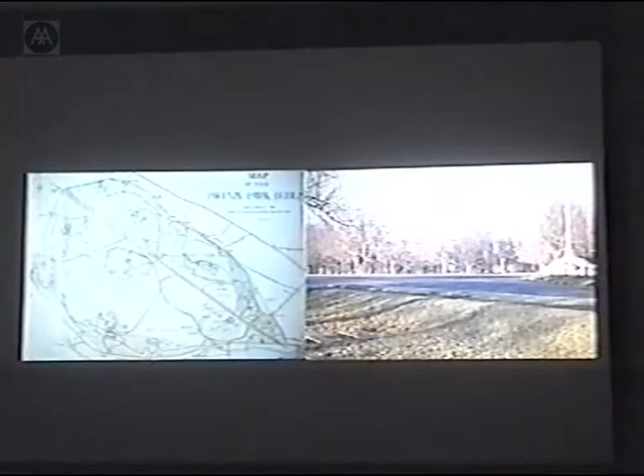They won a competition, and they were fortunate in the people who followed through to build the buildings. This is a famous competition that many people teaching at UCD at that time, or connected with Dublin through the rejuvenation of the School of Architecture in UCD, were involved in. I see here this evening several friends who were in that, with whom I taught, and who were the teachers of architects now in Dublin who have projects.

This, just because people who don't know Dublin are not familiar with it, it's nice to show you the landscape and to show you the city.

North of the city on the west, in Phoenix Park, there was a competition. The government held a competition to build a house for the Prime Minister.

In the Phoenix Park, at the intersection of the park, is the monument of the Phoenix. Behind the Phoenix is an entrance to that site. There is also another site, and a third site, for three important houses: the President's house, the American Ambassador's house, and the former Papal Nuncio's house.

Can I show the next two slides, please? The landscape was that, and coming from the Phoenix Monument in the center of the park, the site for the Prime Minister's house was where there was a neoclassical building that was demolished, and there was a walled garden. The project consisted of two buildings.

There was a guest house and the Prime Minister's house. At the end of the road, we proposed to build a square building on one floor with double height, on 5 squares by 5 squares, with a perimeter on the exterior, with a forecourt on one side of the walled garden, connected through, although separate and independent, access from the north to the guest house.

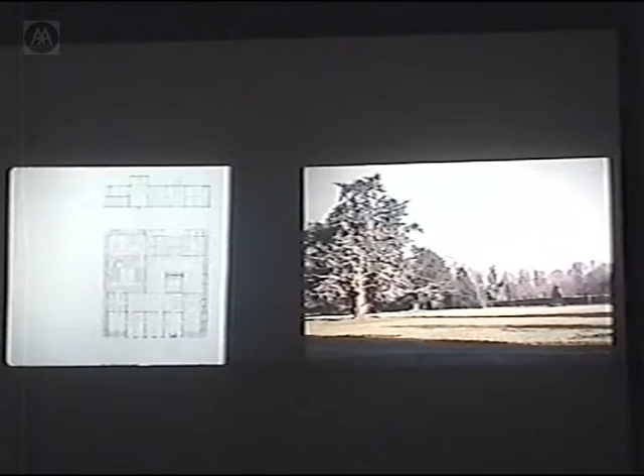Can I have the next slide on the left, please? 5 squares by 5 squares, on a timber and frame construction of about 4.5 meters square. The front room, or first room, which is the entrance hall, was also the living room, and off the living room was a dining room in 2 parts, with an inglenook or a hearth where there was a second dining table. There was a service kitchen on that side, and a small study off this hall or living room.

On these 5 squares here, there was a third entrance, the secretary's entrance, and there was a hall or atrium in the middle, which went through to a staircase. This side of the building had 2 floors, which corresponded to the single floor on the other side.

There was a kitchen, a family kitchen, with a table and a dining room, and a family sitting room, and the Prime Minister's office, and his meeting room, and then the bedrooms were on the first floor.

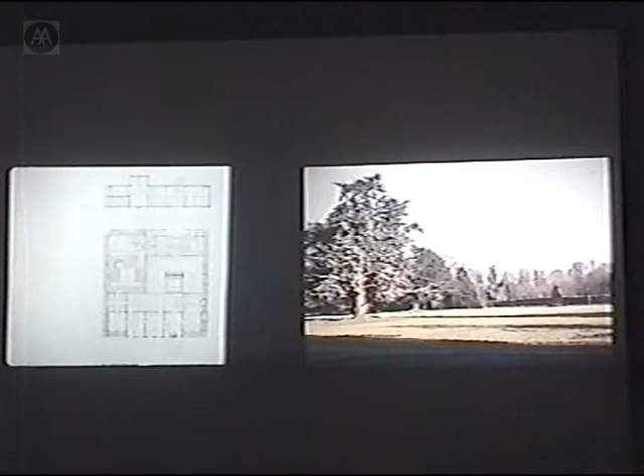The section through that — this room here was 2 stories in height. That part on the right is the single story on the north, and the 2-story part was on the left-hand side. The next 2 slides, please.

The construction of the external paneling of the house was in oak. The next 2 slides, please.

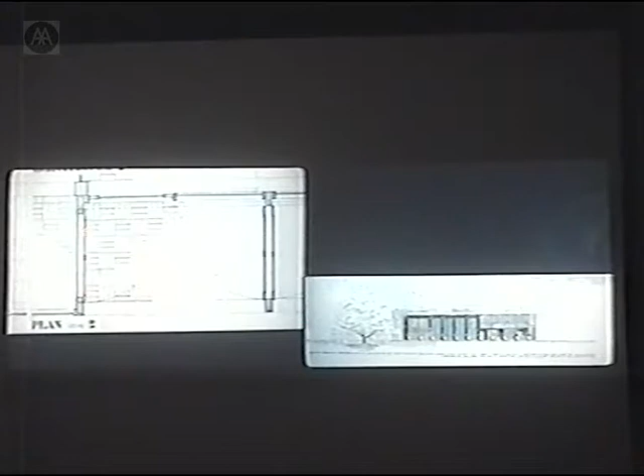The perimeter outside of the 5 squares had a deep double height sort of loggia to the public rooms, or to the larger entertaining room, and then the 2 floors of bedrooms and the private rooms of the Prime Minister's own rooms. About the perimeter was this outer construction outside the 5 squares, which gave the sort of spaces that were insulated, and then also within the depth of that.

On the first floor, the minor rooms adjacent had bathrooms in the light on the perimeter of the main construction. The next 2 slides, please.

Can you take this one back for a moment, please? The interior drawings made for that house showed rooms that were partitioned, with a main structure in frame, and sliding partitions which opened to connect one room into the other, and glass partitions into the double height hall.

Can I have the next slide on the right, which are the drawings made for the furnishing of the rooms. The Prime Minister's office was a room that had a table and a desk, a table with some books and a library, and some windows to the garden.

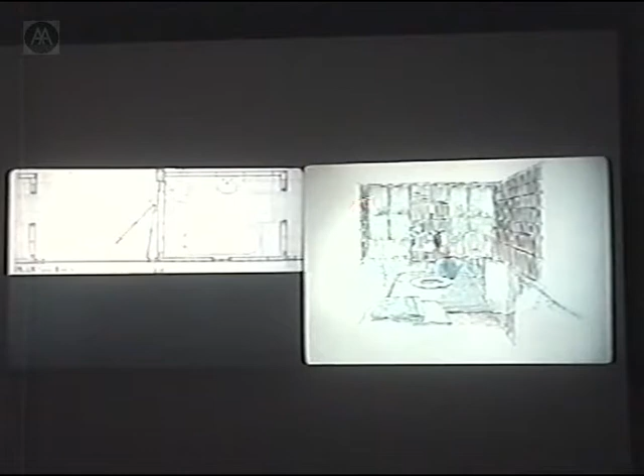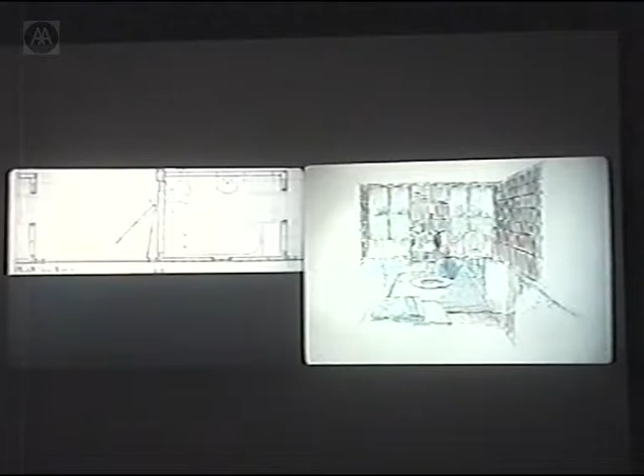Shortly after that competition, we entered another one, and this drawing is shown back to front, but it's actually the right way round, so I can describe it. The Archbishop of Dublin had a competition to build churches on sites in the suburbs of Dublin that were not specific, in other words, there wasn't a particular site given.

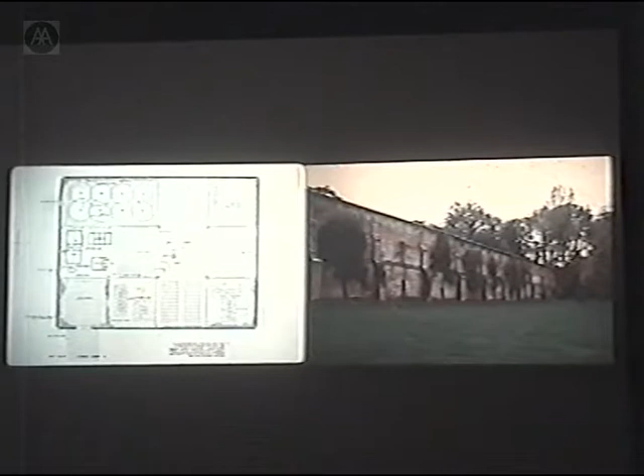We made a proposal thinking about things like the wall garden in the Phoenix Park, to make a wall, to make an enclosure within which there was the modern plan of the church, with a congregation in 4 sections around the sanctuary in the middle, separated by courtyards, glass and wood walls forming the external courts, and an orchard for the priest, then the entrance through a sort of atrium into the confessional and the sacristy in advance. It is incidental that it is cruciform.

On the right, a very modest budget afforded us to build a wall in concrete block around a diaphragm wall, to make this, as it were, a garden.

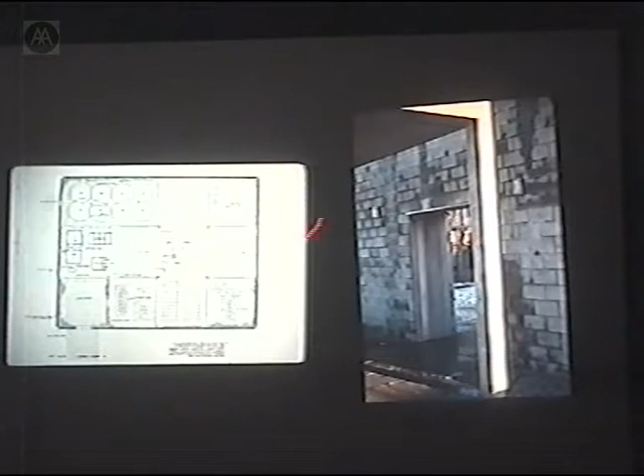Outside the entrance to the church here, this is the entrance of which that is the photograph. There is a porch, just a concrete frame, through which you see through to the doors of the entrance, and you see the beginning of the glass screen.

That was the model made at the time, showing one version of the entrance door into the court, into the wood and glass screen of the cruciform plan within the block wall courtyard.

And the doors, through the entrance - this slide is reversed, it's not quite correct.

The structure proper is a concrete frame within the walled garden. There's an elaborate set of doors in teak, the big doors which might be open on Sunday, and then the smaller doors.

The smaller doors within the courtyard.

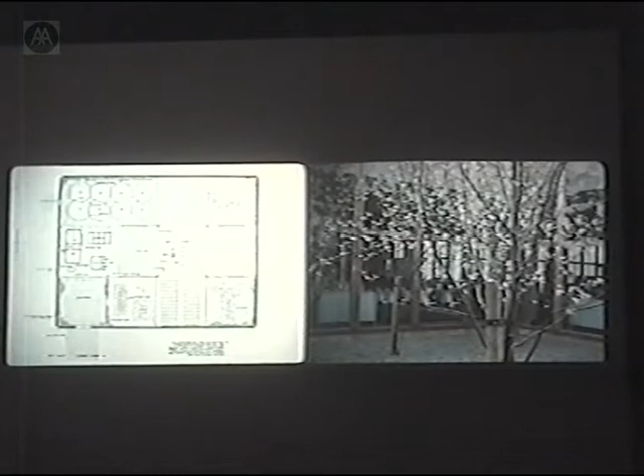If we could go back to show the plan, so I can refer to it while talking about the slides - that's the view of this corner within the garden, between two arms, as it were, of the cross.

These are a series of slides showing the relationship, or the views within the walled garden. And that's the view here.

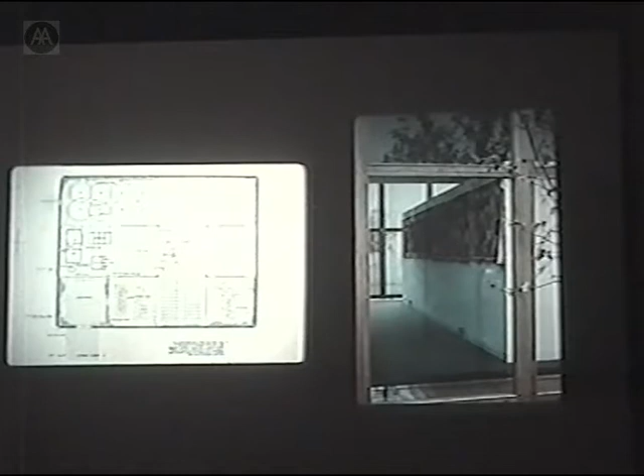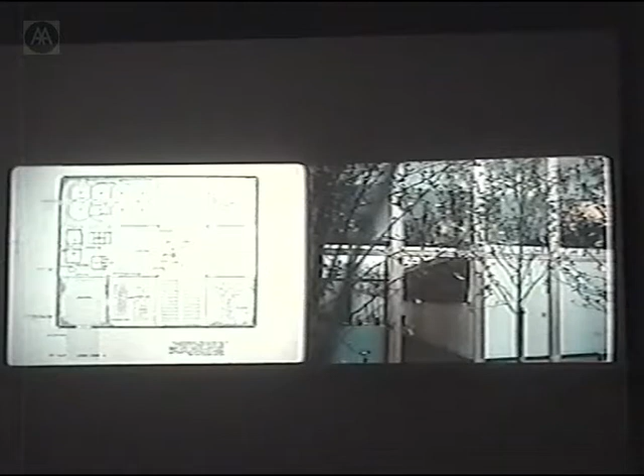That's actually the plan of the room for the confessional within the timber and concrete frame. If I go quickly through the slides, you see that was the first building we built, in 1978.

Internally, if you were sitting here, you could see across to the other side - there's a sort of communication, or conversation, between the wings of the church.

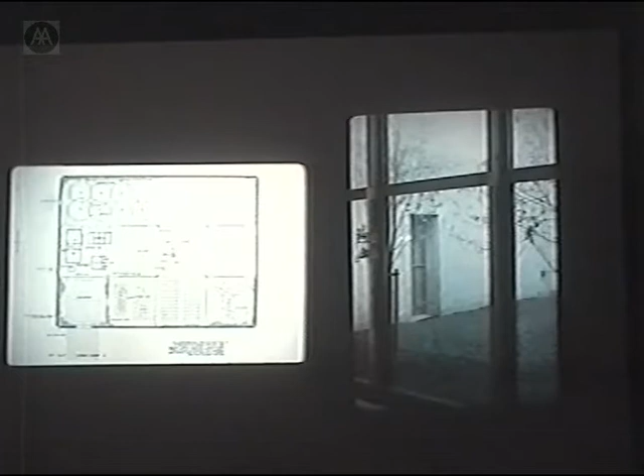Just go through them to show some small detail of the ventilation, or the opening sections within that, in the corner areas here - that's the corner of the windows, or the opening sections.

Go on to the plan, please, and the next plan.

In the centre of Dublin City, Trinity College is a sort of island of 54 acres, surrounded by a railing which goes around the perimeter of it in the centre of the city. I can just show you the streets - this street here leads to the river, and it comes this way into Temple Bar, and it comes that way on Dame Street to the medieval city, which is on axis, a 19th century commercial street built on either side of what is the west front of the college, which faces the medieval city.

And then I want to make some point about this, because I want to refer to drawings later on which this plan relates. The plan of the college was built over 400 years of building within that site.

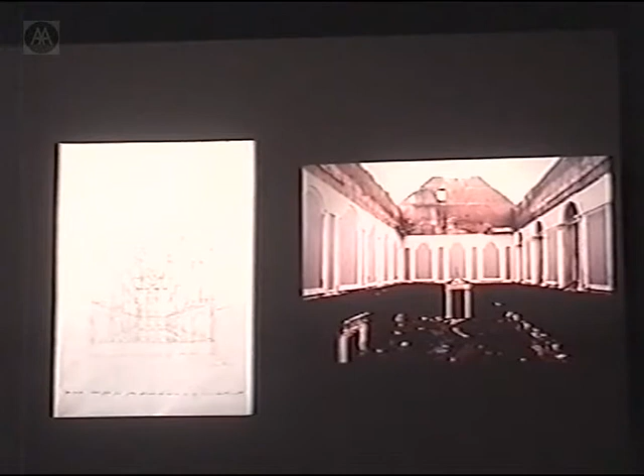And the next slide on the right. And while that conversation was going on, it was our great good fortune that the dining hall was burnt down.

And that was the state after the water and demolition of the fire, which knocked the... that's looking back towards the entrance hall. The next slide on the left, please.

And that's the later drawing of the proposal that we wanted to make in restoring our building, in putting back the hall, the dining hall. There was an aspiration to build a room beside that.

There was an understanding in Trinity College about the changes made in the library, in the old library, but that they readily knew how to build a modern building alongside the old buildings, such as they had done with ABK in ABK's new library.

And so those were some of the... next slide on the right, please. In the place of the kitchen, alongside, this was us taking out the layers of buildings that had been put in and excavating to make a space in which to build this room in the place of the kitchens alongside the hall.

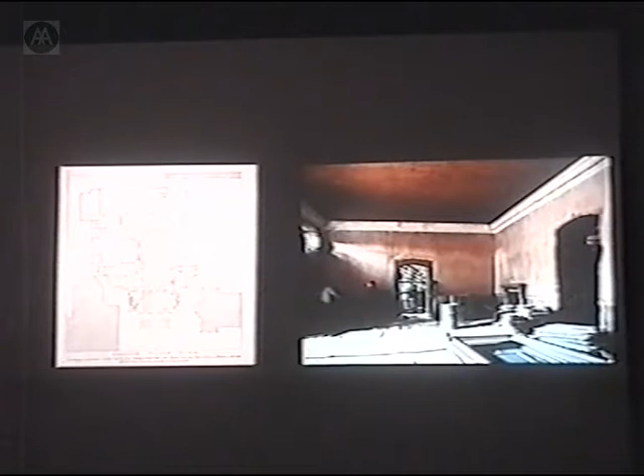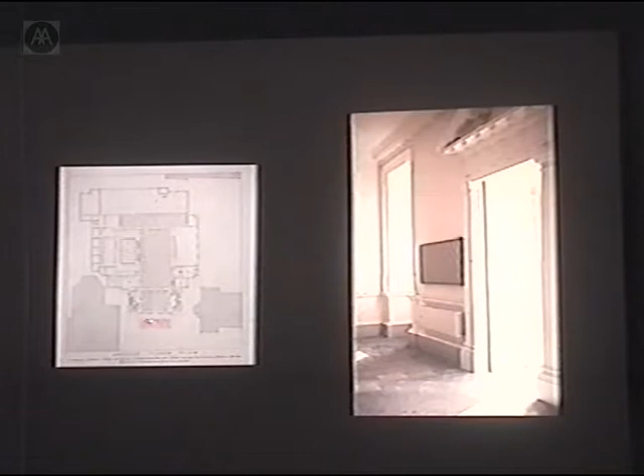And what we sought to do, is the next slide on the right, was to simplify and to bring the sunlight, to bring the daylight into this hall, and to take it back and paint it white.

Next slide on the right, please. And on the right again. And the floor with sunlight on of the entrance hall. And the next slide on the right.

From the entrance hall into the dining hall. The next slide on the right.

And in the hall - I had gone to school when we were, I think, still in the Bauhaus tradition, where history was virtually written off the curriculum, and we had to learn pretty fast about what was expected, to understand the hierarchy of Palladian architecture.

And we knew what we wanted. In a sense, we knew what to do in terms of that. I wanted to put back a white floor, a new stone floor. I wanted to paint it white.

We wanted to bring the daylight into it, and in doing that, to reveal the windows here and on this side, where the daylight had been excluded in the reconstruction of the hall. I'll say no more about that.

Because the big issue for us was the next slide on the left. In this section, which shows the section across the buildings, the hall is here, our proposal for the atrium is there, our proposal for bars and restaurants, which I'll just skip over.

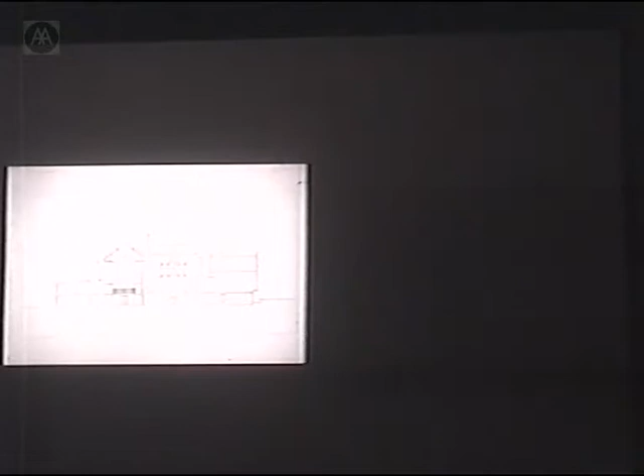So they were small things that were going on around the perimeter - there were at least half a dozen of those kinds of incidents. But go on to the right, please, the next slide.

And we had done a small building in a house. We had taken the inside out of a small terrace house in the South Circular Road, and put in a timber frame in solid oak, just 4 columns on 2 floors, to remake the spine wall in a house. That was the sort of inspiration for the structure we proposed to make within the volume of the old kitchen.

On the ground floor there was to be a social space that had no brief, but that was to be a sort of entry space to the students' bar and the student union facilities. The middle floor, or first floor, which corresponds with the level of the hall, was to connect through, but was also to make connections into the servery behind that panelling on the north wall, at the level which also connected in there. Then the upper levels of that room, which were shuttered, where the staff felt at that stage that they wanted to be independent of the students who were confined to the lower floors.

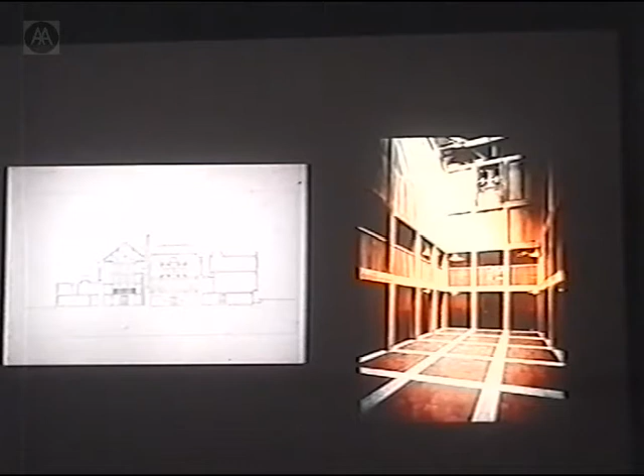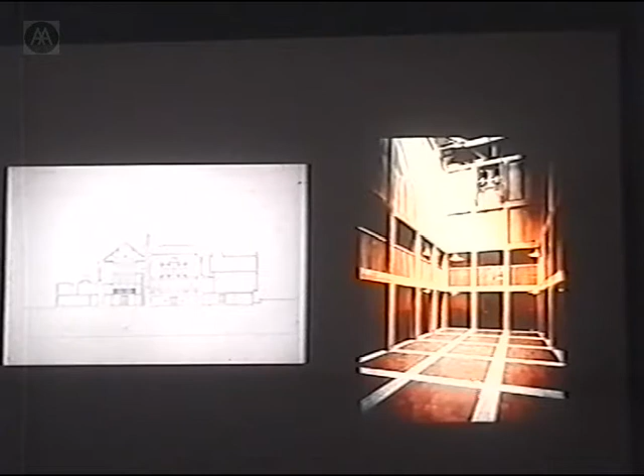And the design of the 4 facades of this sort of small square, which is mirrored on the floor with Portland stone inset in quarry tile.

On either end there are 4 floors. At this level there was an exhibition gallery which came around, and then there were private dining rooms behind the galleries, which had wooden doors and wooden shutters on the outside. There are 2 private dining rooms which are served from the kitchens on this level.

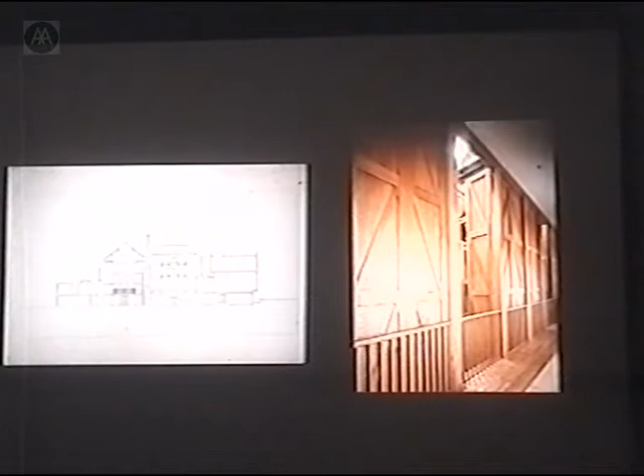And I just want to go around the 4, in making the architecture, or making the facades of the square of this small space. There are some details which show the panelling or the shutters to the exhibition gallery, or the reverse side of the panels.

There's one side which is sort of perfect, in the sense that it's not corrupted, because the staircase is pushed back onto the wall. The stairs here, you see, that's this facade here. A pair of scissor stairs is going up behind, and they're left free, so that the full aspiration of this architecture, which is made of columns and beams, graduating in from floor to floor and resetting and stepping back as they go from floor to floor.

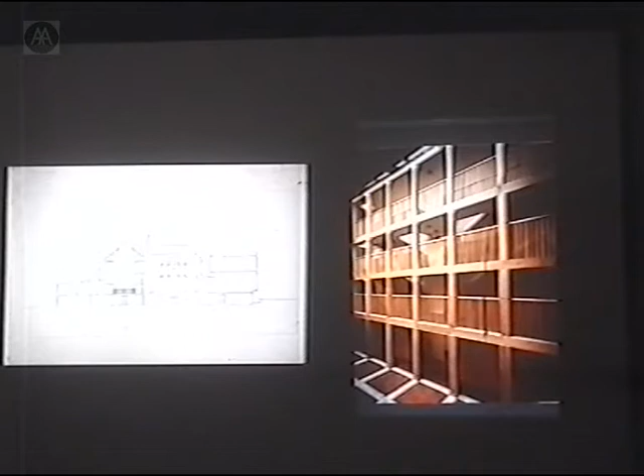That's the staircase. You can see the staircase now, behind, which is pulled back from this sort of, we call it, we thought that this was the proper facade. This one was, but only in that it is in conversation with the other facades around it.

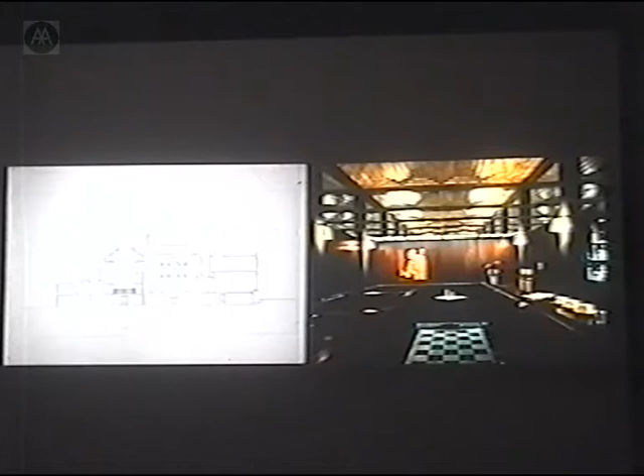While that was going on, there's a small detail I want to tell you about, which I'm showing because the Viennese came to Dublin last week for the Department of the History of Art, who were on our committee and part of our client, and combined with the German department to have a seminar based around the bar, where we made a mirror image of the American bar in Vienna. There was a room there, and the senior common room, which was a very contentious issue, where I showed you the first slide of it. They wanted a bar, but they really weren't sure what sort of bar, and they were unfamiliar with it, and there were important issues to be clarified for us in terms of what we were doing, how we would build, what sort of building, what sort of architecture, alongside making this kind of argument in the office about the reproduction or restoration of the hall, and then the making of the bar.

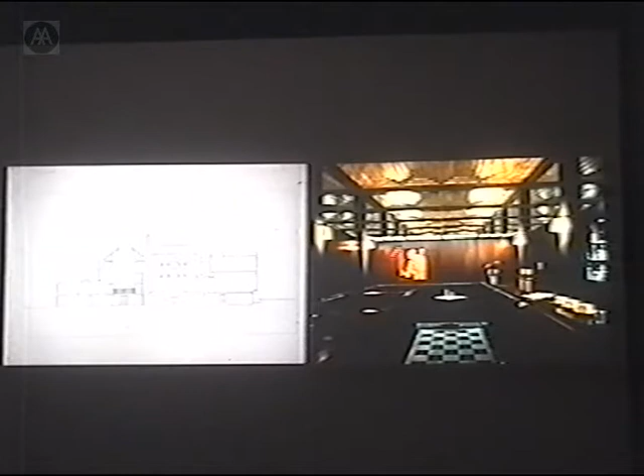The bar is a tiny room, about that size. But if you stand on the seat, you don't see it. It's hinted at in the bar are the columns, and in the mirror, which are reflected in the mirror, and there's this brilliant reflection in the upper level to infinity in the mirrors.

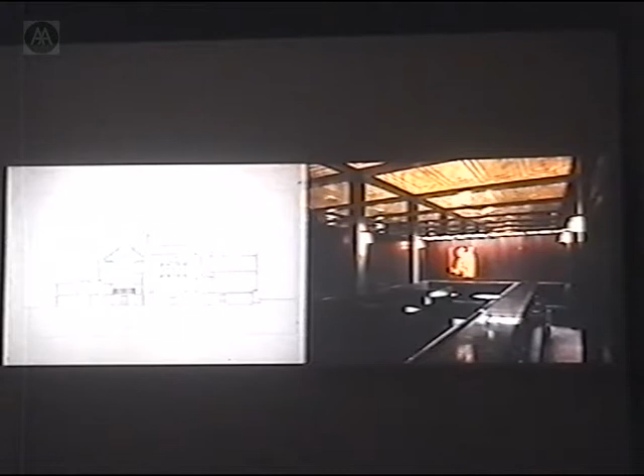Of course, we made it as best we could. We plundered the books in the library, and we made the counter and the stones and the floor and the desks or the benches and the tables as accurately as possible, much in stone and leather, and this we made and painted in MDF. The next two slides on that.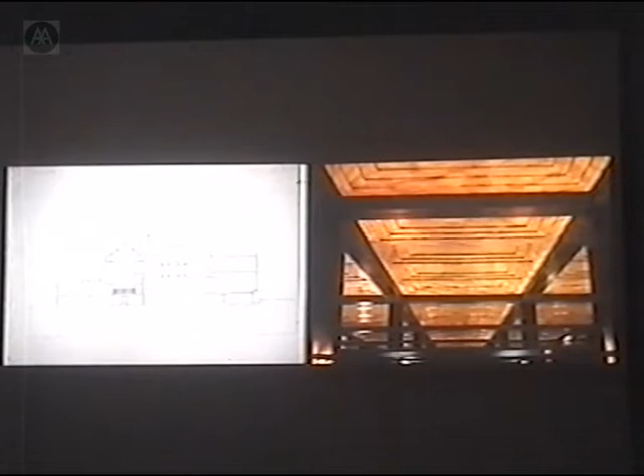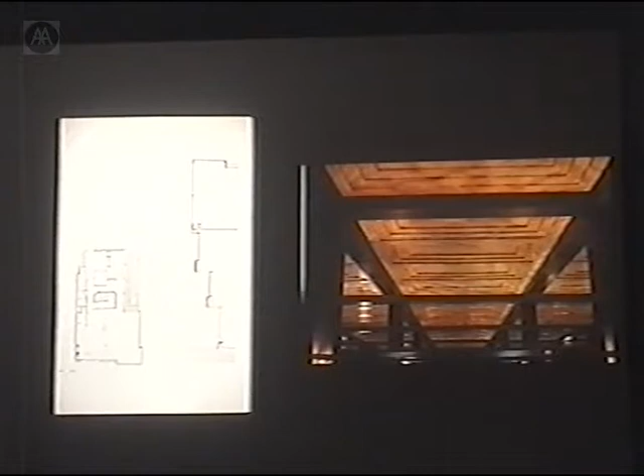The next slide, please, on the left. And if I can just sharpen it - this is a small project that was done 2 years ago on a corner. Can I have the next slide on the right, please?

On the corner near the cathedral of Werburgh Street and Castle Street, there was a reservation made for road widening, and there was a sort of vacant corner there, and there was a reinforced concrete frame building there, and the owner asked us to rebuild. The corporation, Dublin Corporation, put it to the owner that it would be a substantial advantage to them if that corner in the city were to be rebuilt.

And so we made a proposal to reuse this plan here. The plan on that side is the plan of that street, and the plan is the plan of this corner. This project is the remaking of that corner, and the brief was complex as it was.

It involved changing - it changed during the course of it. It was originally to be offices, then it was originally to be all apartments - the corporation were anxious for apartments, but then they changed it during the course of it. And in that plan, out of the existing staircase, we made a new building.

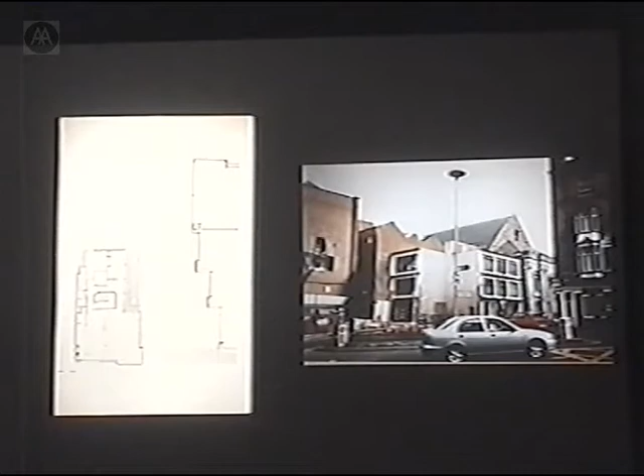The next slide on the right, and the next slide on the left. I'll just describe what goes on. There's shops and offices on the ground floor. There's offices on these 2 floors, and there's 2 apartments on the top floor.

That room there is one apartment, and they step in section from the step around. I mean, this thing turns the corner, and then they step from there. It's cantilevered over, and then it steps back to just give a little pavement here on the corner, and then it gives - there's a roof terrace then there, going down as far as the church on the other side.

I'll just show you - that's the concrete facade that was there, and then that's the terrace of the building, and that apartment overlooks the garden of the cathedral on the other side.

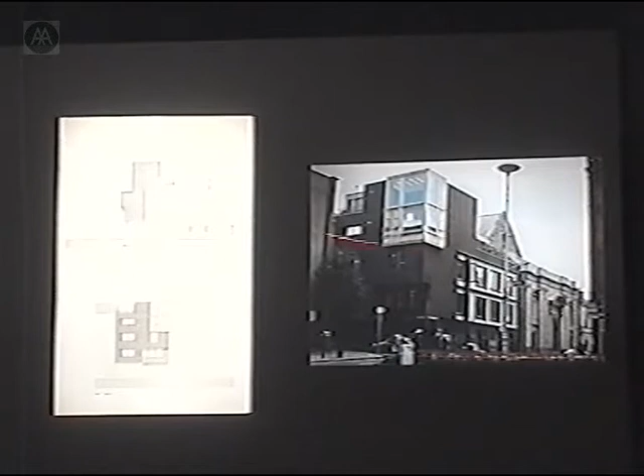The next slide on the right, and again - that's on the other side of the street, looking back up from the church to the corner on Castle Street. The next slide on the right, and then looking down towards Dublin Castle.

And at the end of Castle Street, the most wonderful thing has happened recently - I want to just show it because at the entrance to Dublin Castle, which is there on that corner, at the end of that street, is where the civic offices have now moved from City Hall to the new office on the river. And the building, the City Hall, which was the Exchange, has now been opened, and the offices that were in it were opened, and the Temple Bar then is on the left at the end of that street, down on the right. The next slide on the right.

That's the interior of that apartment. The next slide.

And the roof terrace, and the next slide on the right. And the next slide on the left. That's the Castle Street thing. The next slide on the left.

A small house, that's a sort of normal suburban 19th century street in Dublin. Waterloo Road, with the lane, the main street, and the Mews Lane at the back. We had a project to build a Mews house on that lane.

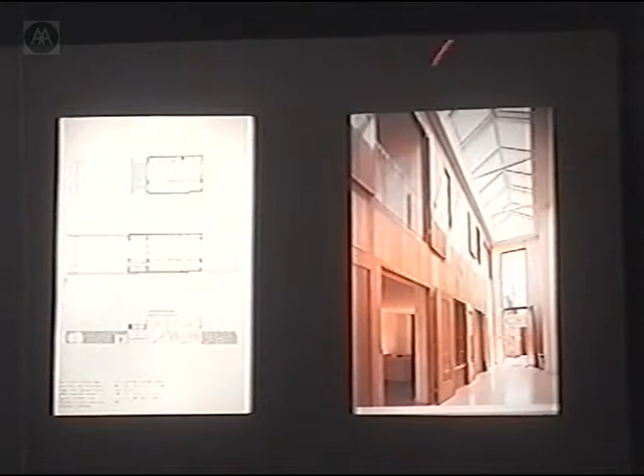So that's, I just showed you that, because it's to follow an argument, to follow the theme, and to show the apartment building that I'm coming to in a few moments. The next slide, please, on the right and on the left.

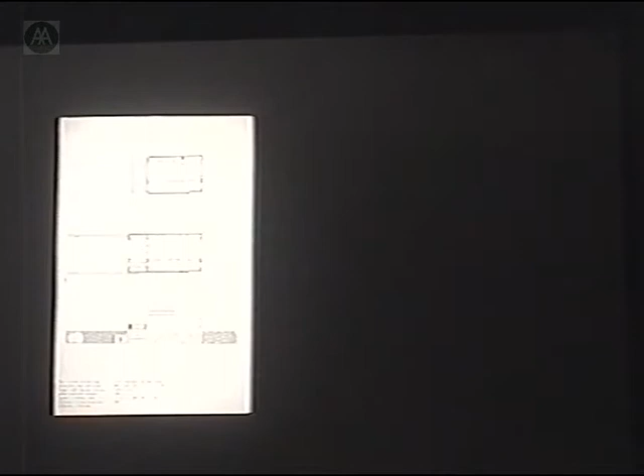We were asked to do a competition, in partnership with a firm of architects in Cork, on a campus of a technical college. There are about 8 or 10 of those campuses in the provincial towns in Ireland, the regional technical colleges, which were system-built with a concrete frame, panel, and single-glazed aluminium windows.

They were not proud of them. And there had been experience elsewhere in other cities where they had either built on top of them or built around them.

We were anxious for two reasons really. One is that we had done enough, I suppose, fiddling with old buildings, and we said that thing is really, whatever integrity it has, its own integrity - there's a fairly rigorous, flexible frame that can be refitted.

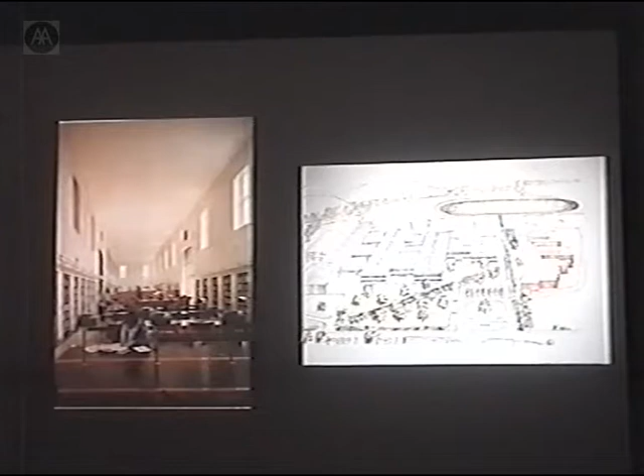In Stockholm, they had copied the room in the British Library. He had an idea about a hall, a public space or reading room surrounded with books. The reading room in the next slide was the Stockholm reading room, which is sort of plain, and I didn't love it.

In Trinity, the library had a plan like Smirke's, like the North Room in the British Museum, where daylight comes between the books. That library originally was that size, and to make it into the library it is today, Deane and Woodward took the roof off and added the upper floor to make the galleried room at the upper level with light coming between the books.

Louis Kahn in Exeter had recreated an Italian ideal of a desk in the window and a study place in a double height room.

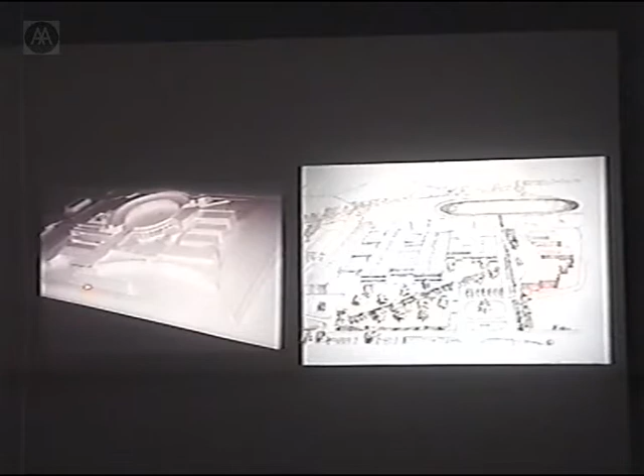This slide is out of place, but I want to explain one thing about it. It's a bad slide, the only one I have, because the model was destroyed. The crescent we proposed here said that if there was a plain wall built there with no brief, it would act as a controlling or guiding proposition to build in increments, in three phases, the extension of this library.

A number of years ago I was talking to a friend here at the AA about this library, and arising out of that and the completion of that library, we now have a plan of that scale. That's what we're working on at the moment in the office: a circus on the north in this position, and that building there, involving four new buildings and an entrance here and here, and now a new entrance from the west.

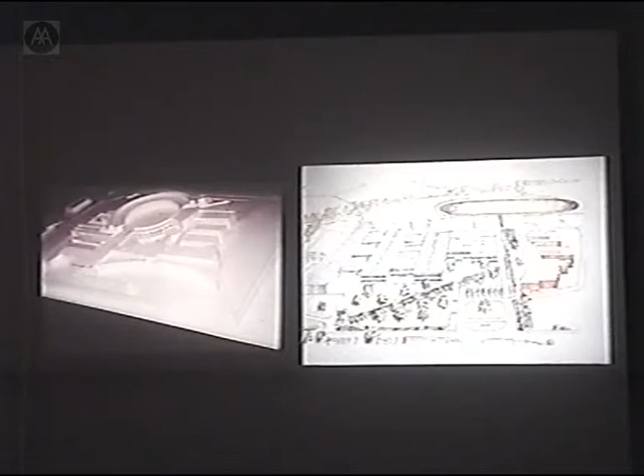Our proposition of the east-west passage here proved true, where the sports access and the new access to the college is actually from that side. That's a really thrilling and wonderful huge scale project which we're now working on in the office.

The proposal for the library in Cork was that we would build this crescent on the north of the existing building, opposite the main circulation route, knock a hole in that wall, and cross to a door in the center of the plan. It's exaggerated in the plan to show that at that time the vision was of that size—a very large-scale development that was proposed. Now it has moved on dramatically; Scott Tallon Walker are building two buildings here as well.

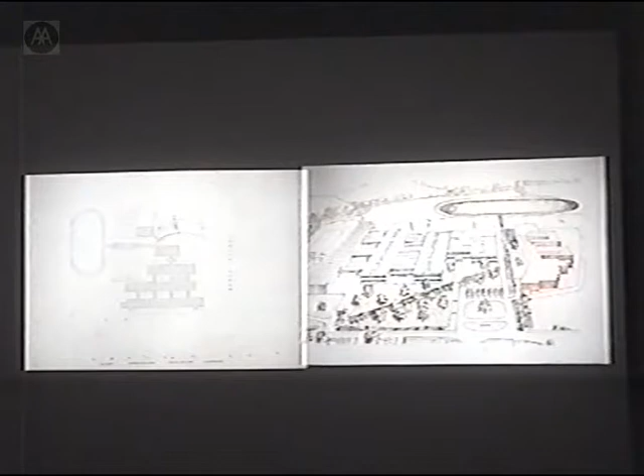The slide on the left is the plan and section of two phases of this wall. The library plan here—I want to show its plan in relation to its section. The proposition was to build the wall which would guide the development and make the crescent.

The entrance was there, and the circulation was in the passage in the middle, and then we pulled the book stacks apart in the way I've shown you in Trinity and in the North Library of the British Museum. This discovery of pulling the stacks apart to make rooms, like the atrium in Trinity, now makes six atriums side by side—rooms that could also be extended to expand the library.

If I can just briefly show, it bears study for a second, the section. That section is true—the plan is in proper relationship with the section. There were two things I had in mind.

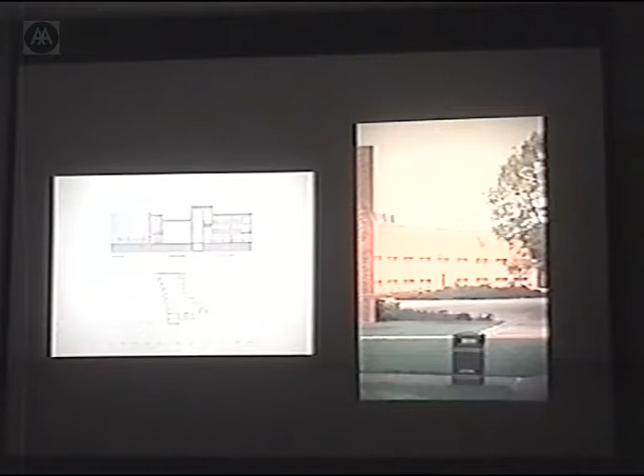I probably should have had that plan, but the section of it makes it easier to explain. The first view of it that you were seeing of the library—that wall is now 140 meters long. The first view of it is this. This is actually the first half of it.

The library has been doubled in the last few years, and now includes the complexity of the position of the library within the plan, involving lecture theatres and IT, the beginnings of the IT rooms, which are associated with the library.

I'll say something about that in a moment, but just to explain more fully the plan. The periodicals are here on the first floor. The reading room is there. There's reading for 500, and then the tables are here between the stacks, which are pulled apart.

In this succession of galleried rooms, the first room has no furniture, and that was described as being a sort of free hall. The desk is here, the entrance is around the desk there and there, and that was the librarian's hall. And then that gives on to the lift and stairs at the back.

There's classrooms and offices and accessioning coming in here at the back. The boiler is there at the back, where the air is returned, and the plant room is all there at the back. And this room here has a fireplace in that position.

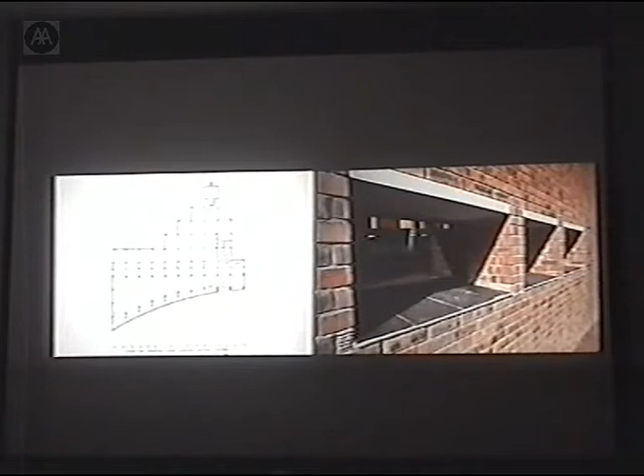So this notion of white limestone and brick and slates, that's the detail of the diaphragm wall opening the windows into the reading room, and the light coming through in the central passage beyond the reading room.

The concrete block is exposed externally at a certain point where the extension is anticipated, where it is expected that the building would extend.

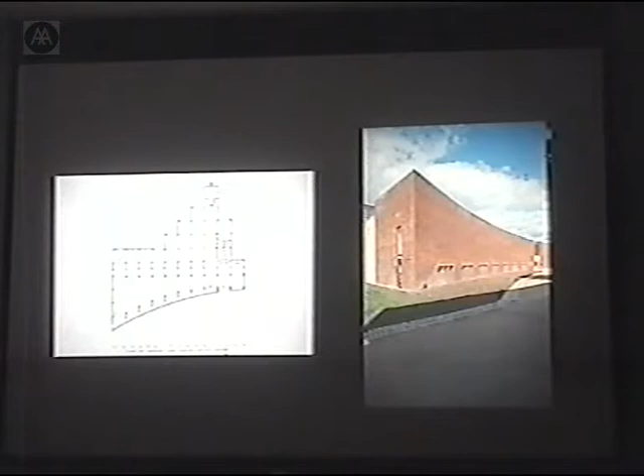The entrance hall, where there's this direct sunlight coming into it - that's the signal of the central passage. The doors are modest, and elsewhere the doors are recessed behind the brick, so that they don't interfere, just to make the brick read, and to read the masonry, to clarify or simplify it.

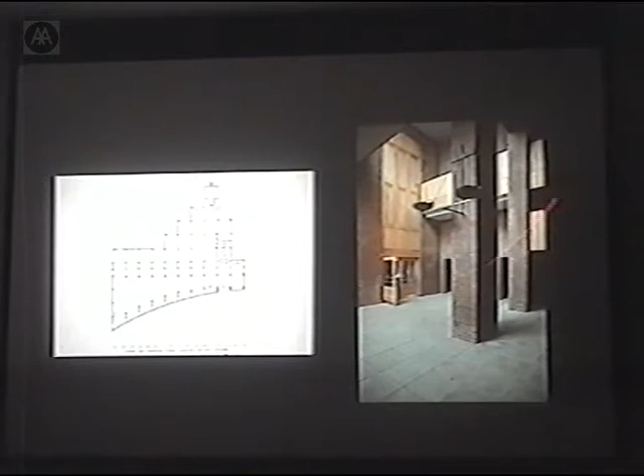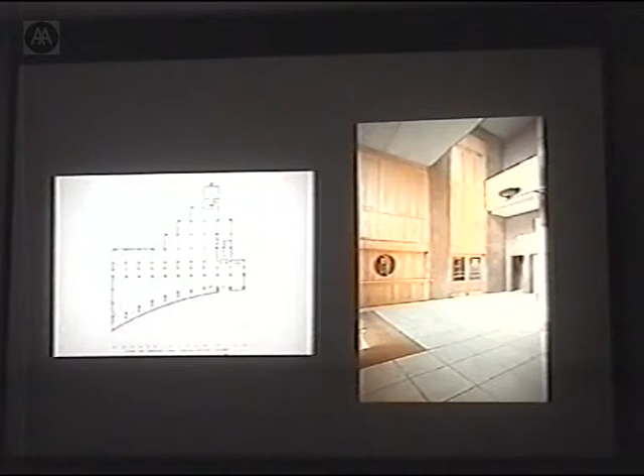You see the reading room, which is signalled by that, and the beginnings of the central passage, which goes through between the tables in the reading room on the left and the galleried rooms on the right.

The concrete slab, the precast concrete slab, is a commercial or industrial slab, spanning about 6 meters. It's built on a 5.6 meter grid, which was mathematically worked out for the most economic dimension we could make of this.

I'll go back, just to show - sorry, I was going to show, in explaining the building, the construction of it.

A concrete column - these staggered columns here, which are sort of waltzing or coming through the space, not in a line, which is very beautiful, poured in cardboard. Then there's the beam, the downstand beam, coming off that column onto that column, propped off the brick column there and there. And then the ordinary block wall, which is now to be covered in books.

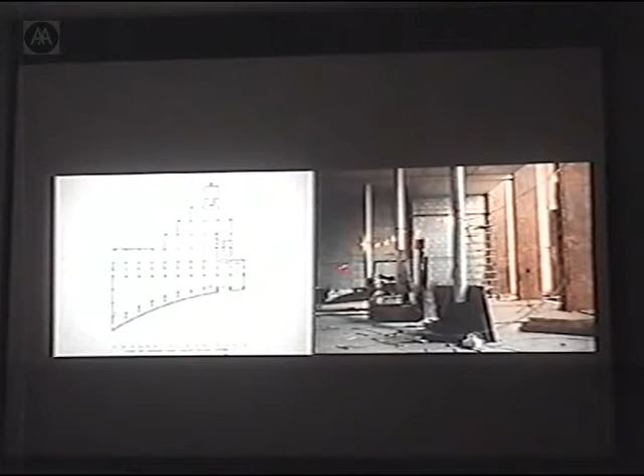That's the sort of thing I was better able to do, and that was done by a man who makes furniture - that was the library man, now making those in about 125 or 150 square laminated solid columns and beams, and colonnade to the book stacks on the ground floor.

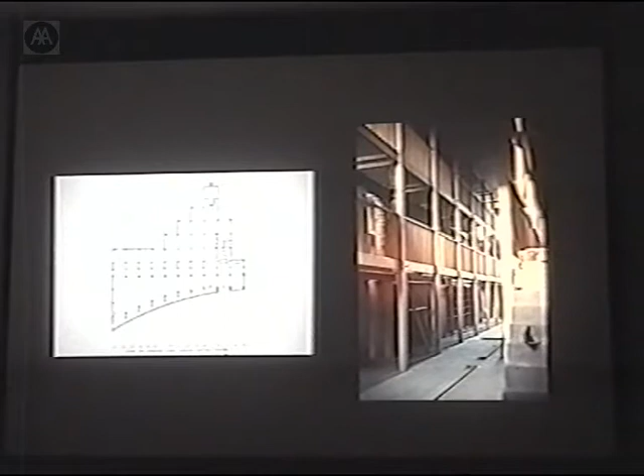That's before - the installation of the book stack into the concrete frame.

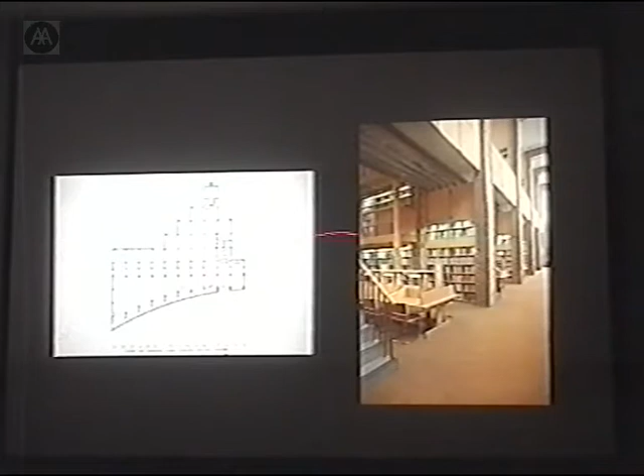And then you see off the passage, each stack, each gallery, has its own staircase, and the staircase here goes to two levels, which are student access, and the upper level then, which is the reserve access of books.

That's this first hall, which has the fireplace and the lift and the access to the offices.

And that's the reading room then from the passage, and the periodicals are on the upper floor, and then the windows on the ground floor, and the light then, that's the switched back light coming into the periodicals on the wall facing out to the front, to the blank wall.

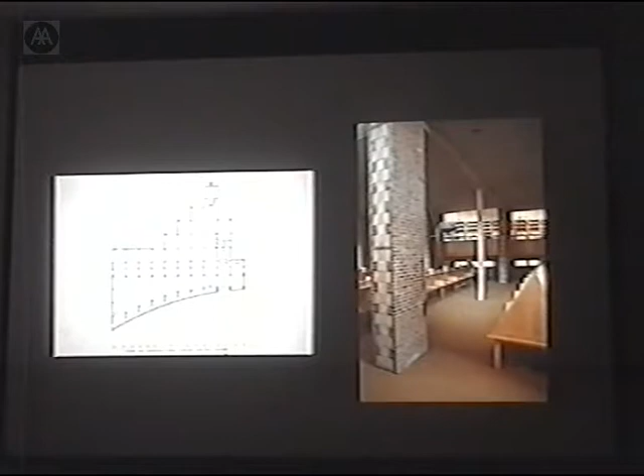I'll just go through them now. That's a shot, and there's another one of the general view of the library, of the passage and the stacks and the tables, and then the periodicals in the brick, which corresponds with the brick in there.

We talked about the question of computers and tables, and how many computers they could afford, and the realization that it's actually a place for study, and whether there's a book or a computer on the table, it's only a matter of a wire.

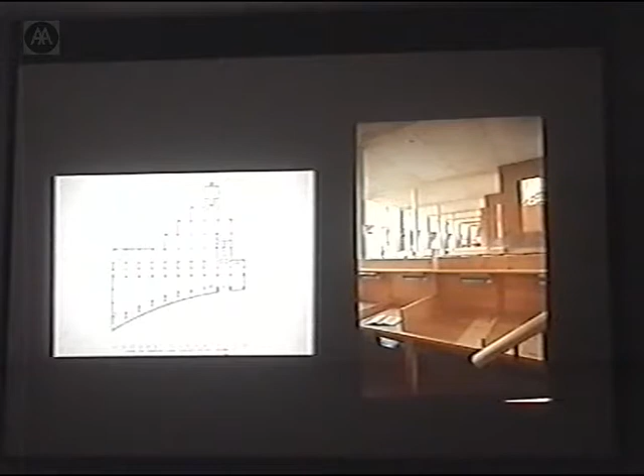That's tough. Next slide. That's the periodicals looking down. Next slide.

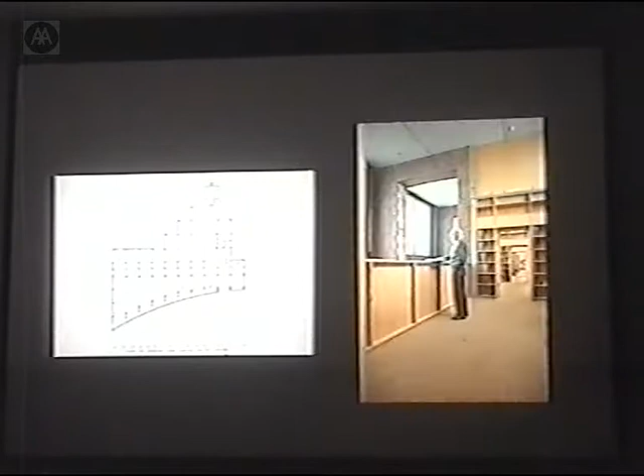And then the enfilade of the reserve books on the top level coming through, and not just on the top level — this is looking down into the central passage of the reserve books. There's also a passage through the books for readers through the stack, so the complexity goes on. Next slide.

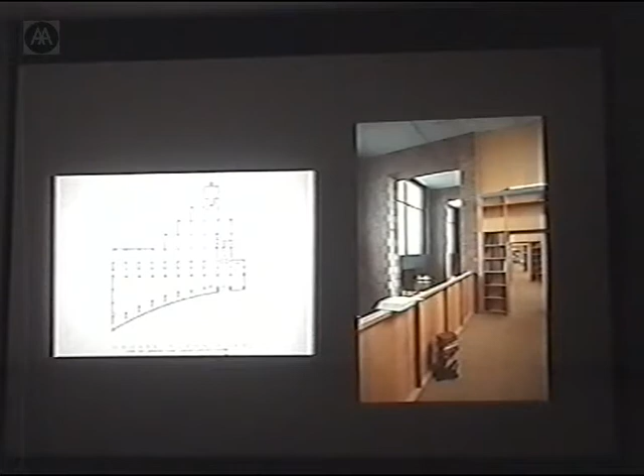That's from the upper level looking through the south light, the clerestory light, into the reading room. Next slide. And that's the last slide of those, of the concrete and brick and timber interior.

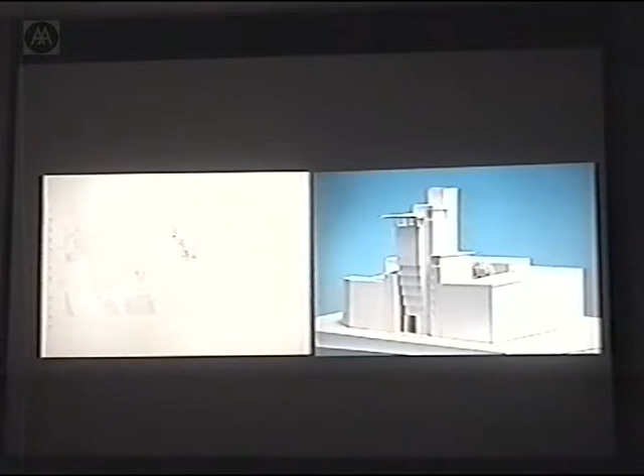We said that if you built about the height of some of the other buildings, you could have a building like that in the city block — that block there, which is our block, and there's the block. We made a proposal that we would build a building that broke the height, or the wall, of the city.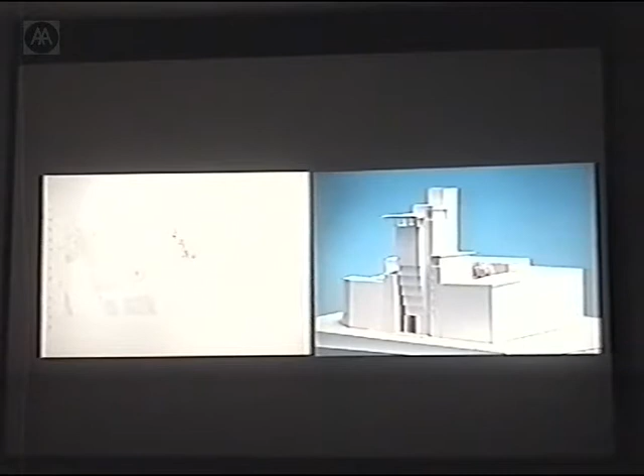That would give us a plan of a modern apartment building around a staircase and a lift, with a lift lobby on the ground floor in the American fashion, and that lift took you to the views of the city at the high level on the upper floors. Next slide, on the left and the right.

Another model was made of this tower, which was crude in the beginning but was now beginning to be clarified in relation to what the plan should be, how to circulate it, and how to deal with fire, and so on. So those are 2 of the early models.

Now, these are the drawings of it as it was built, and I'll try to describe it to you. If you've seen it, it's on this street that comes from the river, the medieval street that comes from the river to the castle.

The possibility that from the upper levels, the southern sun was — I felt that if you worked it out, it was actually quite a reasonable thing to do, to build, if you dealt with all the conditions, if you understood that there was a relationship that could be made between the upper levels of this.

If I go back to this plan here on the left for a moment, I'll try and explain the relationship between that. The plan on the left, please.

The tower that we suggested was here, on the basis of this entrance - not that relationship, but the relationship made between the gate of the castle, Newcomen Bank, and the west facade of City Hall, and a building put in here. That relationship could have been made and reasonably discussed with conservation bodies and the local authority, showing through examination and understanding of the relationships in that area that it was a sensible thing to do.

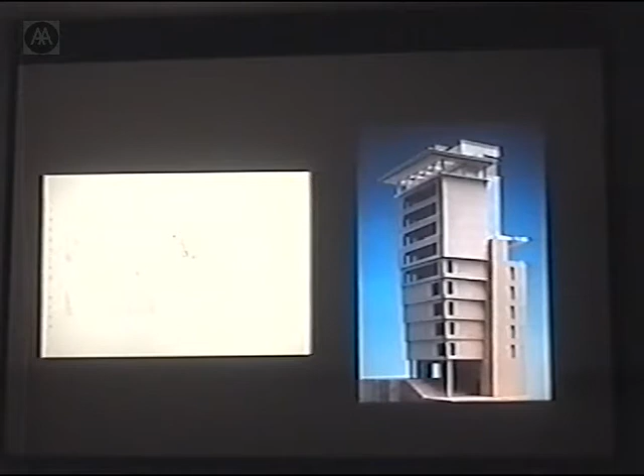Can I go back to the next slide? I'll just describe the building now in a straightforward way.

Our site extended from there to there, and in making a single staircase lift building, we needed about that width. I was anxious to make an entrance to the courtyard in the middle, to make a split, a crack in the street that would bring western light through between the two buildings, putting them within less than a metre of each other at the highest level, and to push out the canopy protecting the southern sun, forming this roof garden for the three apartments on top. The daylight came down between the buildings to the ground, where there was a flight of stairs behind those gates into the garden in the interior of the court. This is the garage door for the whole block's development, and these apartments here fill in that piece of the street, in advance of the creche which was part of our brief, behind those two buildings in the garden. The 3-bedroom apartments were to the south, and 1-bedroom apartments to the north of the stairs and lift in the middle.

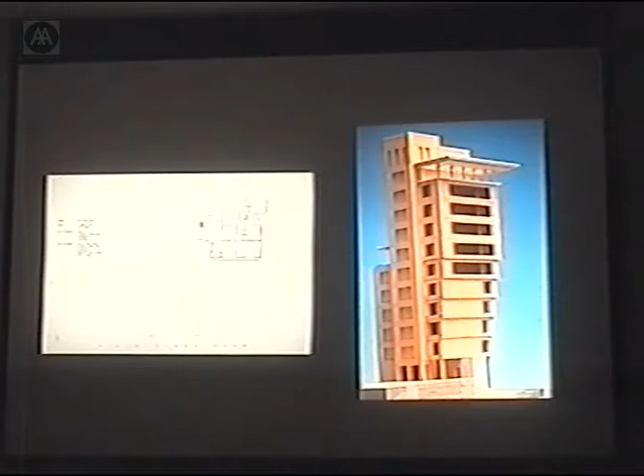As you go up, the apartments vary from apartment to apartment, but basically there is a sort of 3-bedroom and a 1-bedroom apartment notionally. And then there's a bridge from the kitchen of that one onto the roof of that one.

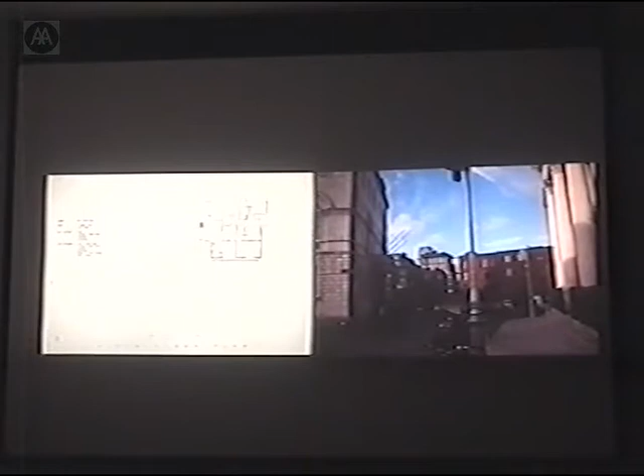The next one, please, on the left. The section through it, the next one on the left. That's some of the working drawings of the front elevation of it.

Just to say something about the materials, if you focus on the one on the right - however successful it is, I'm not too sure, but that was the proposition - that this tower would have a relationship with this stone building, with the City Hall on the right, and the bank on the left, coming in here straight.

I'm standing at the gate of Dublin Castle, and then the top 3 floors with the southern windows, with these 3, which is really now only 1 room, which becomes 1 room as I've explained in plan.

That room then has this extraordinary perspective of the mountains to the south and the shade of the canopy over it, and then this little triangle of city space between the restored City Hall and the entrance to the castle, and this building here, which has a plain stone wall, just a sort of stone, with the chimney, but which is kind of about the height of what we said we would build to.

And in the construction of it, there is a concrete frame which is faced in timber, which permits you to have this kind of depth of opening, which has got these balconies like in the atrium in Trinity, and doors and furniture inside in the thickness of that. Within the room, the wardrobes are there and there.

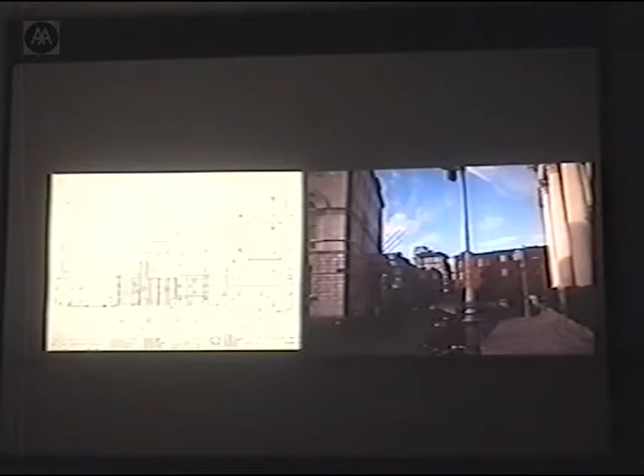It is possible to make a sort of masonry architecture and to use a white mortar, where the mortar then takes over and becomes the wall-making business of reading brick in a wall. The next slide, please, on both.

It's desperately hard to photograph this building, and all these slides now, I have to apologize - that's Peter Cook's photograph on the right, so he can take the credit for it. But that's looking down the street.

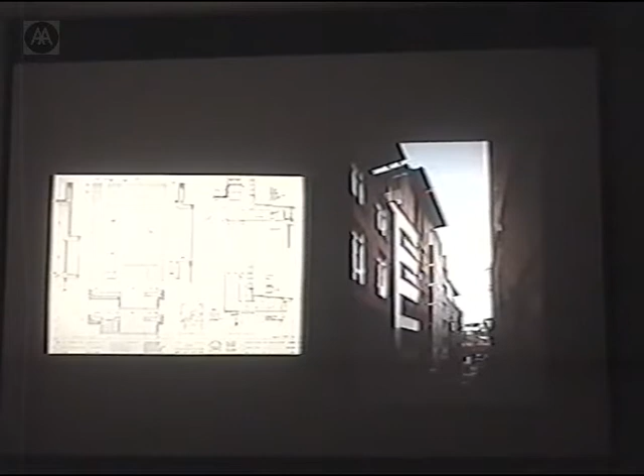This is the building before the timber tower, and then the canopy on the front. The thought was that the front entrance, this canopy here, which comes out beyond the footpath, makes a sort of entrance to the whole thing. That's the entrance canopy for that facade.

The next slide on the right. Yeah, that's looking down the street. And there's the screening canopy to the south on the glass fronted apartments, and then this canopy which comes out, very strong on the footpath. Although it's 8 or 9 stories high, it makes a sort of porch or hall or space at the ground level.

Next slide on the right. That's the slide from the rear, with the 1-bedroom sitting rooms here, which have got these quite elaborate windows - they're inglenook, with little columns on those windows internally, and they're top hung casements and side hung ventilators on the side, similar to the ones over here.

And this is the double height glass to the living rooms of those apartments. There's a kind of stolen level where you bring the level of the seat of the bay window down, giving the lower end of it to the apartment below, and some of the shading or screening of this stepping of the timber, weathering of timber, is being protected also by the overhang of timbers on the top. The next slide on the right.

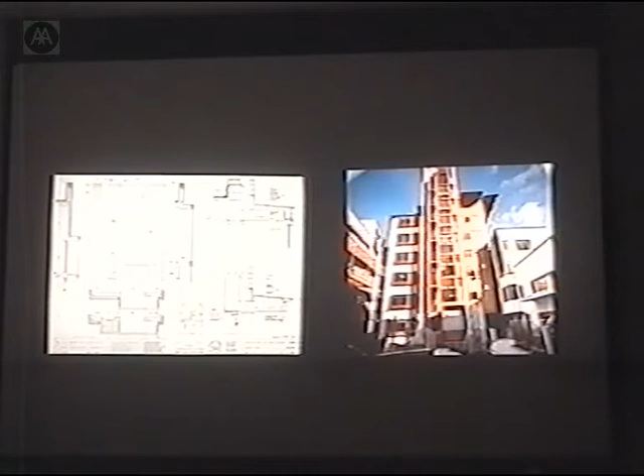And in parts where it's less - in some parts on the street on the front, I'll come to it in a second - but in the split between the buildings, it's sheeted and covered. The board is covered, but it's also under the windows. Those are the kitchen windows in the 3-bedroom. They are panelled, framed and panelled. The next slide on the right.

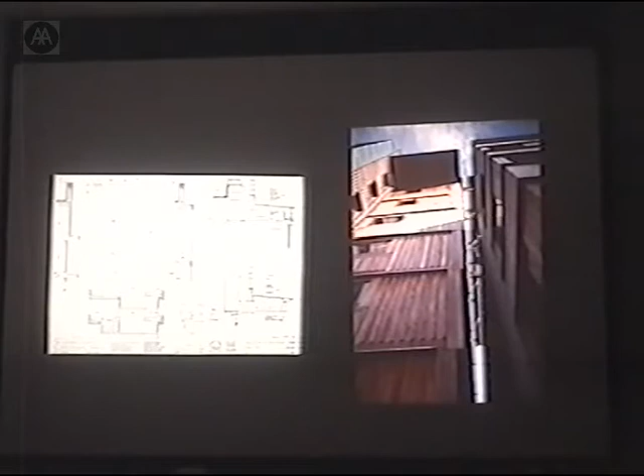That's the facade, the front onto Exchange Street, where on the top floor you have this double height apartment with this deep, extraordinary admission of daylight, of this depth underneath that screen, which has a sort of extraordinary calm. I'll show it in the interior slides in a moment. Separating, that's the bedrooms, and those are the living rooms, and that's the ordinary apartment.

And when it comes down here, it gets a bit iffy because of the light. The light is fine there in that apartment because it has the light from there, and the one down below maybe is struggling. But there, in the struggle to build the thing, they took 2 floors off of it, and it would have been better. When you see it built, it would be no problem to put 2 or 3 floors on top of it - it could easily handle another 2 or 3 floors without conflict, or without exaggerating its significance.

And a wonderful thing happened - the man who was the advisor, the economist who was advisor to all the development in Temple Bar, they sold these apartments. They hired the Shelbourne Hotel and the ballroom in the Shelbourne Hotel, and they put 19 of these apartments at auction in one afternoon, and they sold for astronomical sums of money.

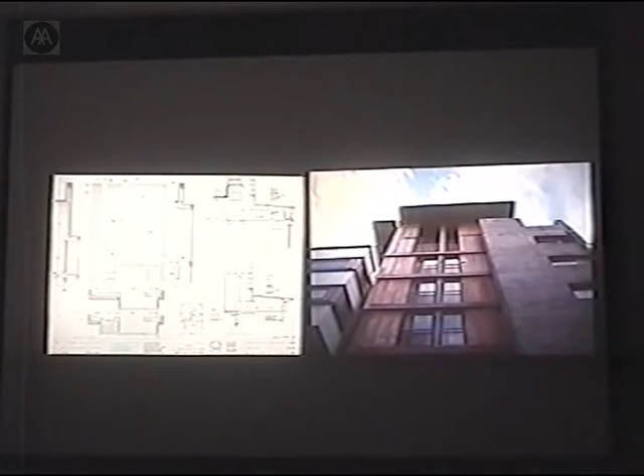the roof garden, which I'll show in a second, the top roof garden. And there was a library to go in that. And so when he bought it, he came to the office and he said, would we finish it the way we wanted? And so now we're putting a library. The library is going into the top floor now.

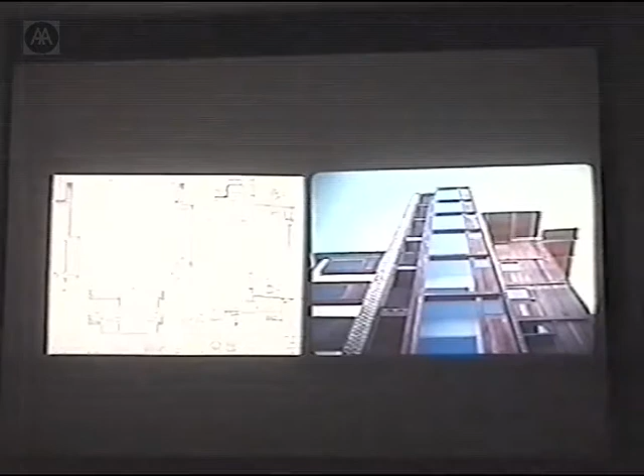The colour is crazy in that one. And the colour is funny in that one as well.

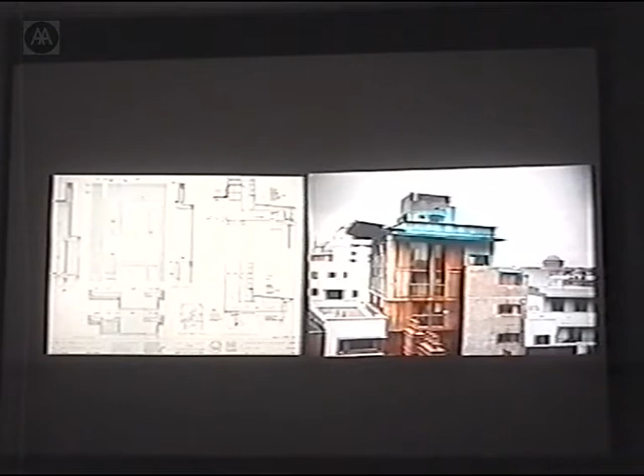But the forecourts and the Phoenix Park on the west, and then the roof garden, his roof, the library is there, and this the canopy. There's a sort of a pergola thing. And a bay window here onto the roof garden of that, and the screen. This is beautiful, the glass screen on that one. But I haven't got a slide of it.

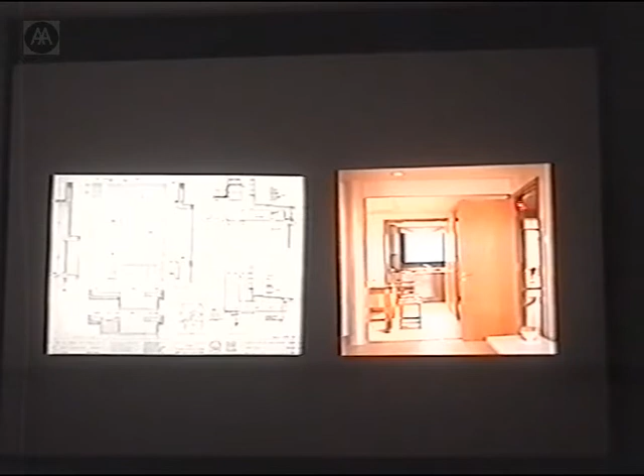And internally then, that's the sort of nonsense about small rooms with the sliders. That's the pivot from the kitchen into the dining room, into the living. So that this room actually, this is the 3 beds, but it's really one room. And then the slider has been taken out of here, slides through the wooden frame here, which has a tiny little door, about 100 mil wide, that closes after the door. In fact, the door is gone forever. The door is gone then into its position out of the way to go into its partition, stainless steel counters, and that's the window on the end of it.

And the staircase to the library. This is the staircase leading onto the roof garden to the very top of the tower. And that's the window over and the dome of City Hall, and this sort of seat and these tiny windows and shutters going out onto the roof.

And this is where the library is going into that flat. And that's the roof garden of the library. And that's the last of those slides.

Yeah, there's a staircase. That's the stairs where the final sort of business of sort of oak detailing, where there's this staircase which has the handrail, made in the paneling of the stairs on stone steps, coming from the street level up to the garden, all that stuff of window making and boarding and brickwork and stuff.

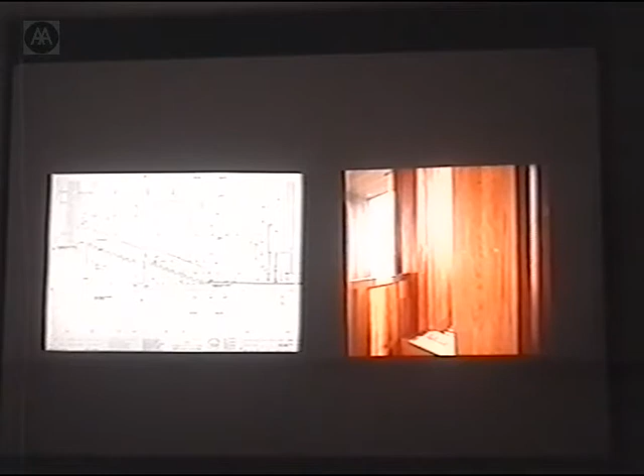And then those are the last of those. And then there's just one other. Yeah, this is all of the slides. That's the last slide.

Just turn off that one for a second. I just want to show the last building that I wanted to show. It's not finished yet, but it's under construction, and there's a nice story to this one, which arises out of the story of the circumstances or the conditions of what has happened in our office and in a lot of offices in Dublin, where people have an extraordinary scale of work or things they didn't expect to have when they started in practice.

And we built a small building in the Financial Services Centre for a guy who owned a radio station, and he went on. And this building was criticised because it was just a brick building, and it wasn't beside. It was beside the financial buildings, and it wasn't posh enough. I think there is a sort of concept in corporate architecture of sort of expense which brick doesn't represent, which is not represented by brick.